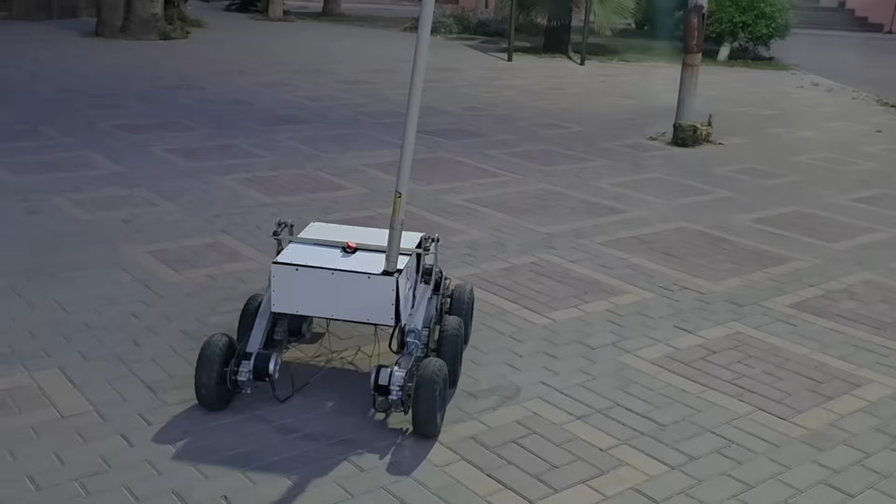Behind every successful rover is a mechanical system designed to survive harsh terrains, carry critical systems, and perform with precision. We are the mechanical sub-team responsible for transforming ideas into fully functional rovers. Our design process began with identifying task requirements and competition limitations. Through research, brainstorming, CAD modeling, and a lot of simulation, prototyping, and testing, we transformed our ideas into Falak. Let's divide Falak into three main parts.

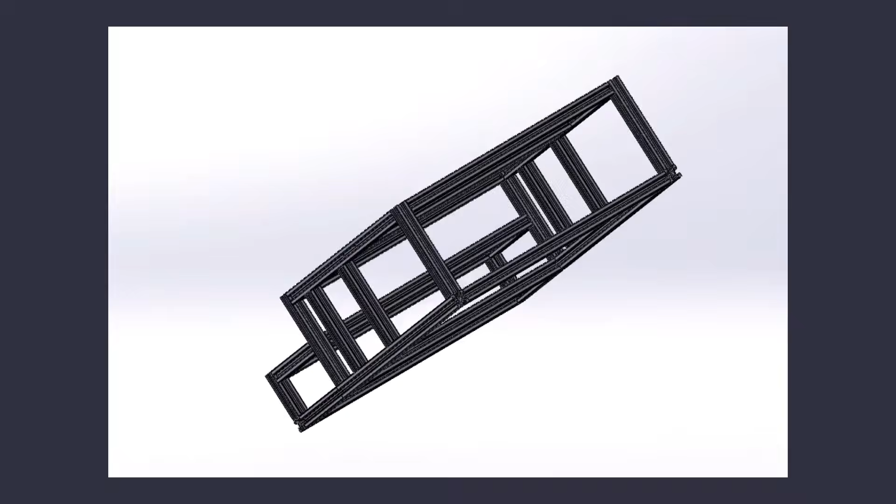First, chassis. The chassis is built from 20 by 20 V-slot aluminum profiles, providing structural rigidity, high strength-to-weight ratio, easy reconfiguration, and efficient housing for batteries and electronics, enabling easy access for maintenance.

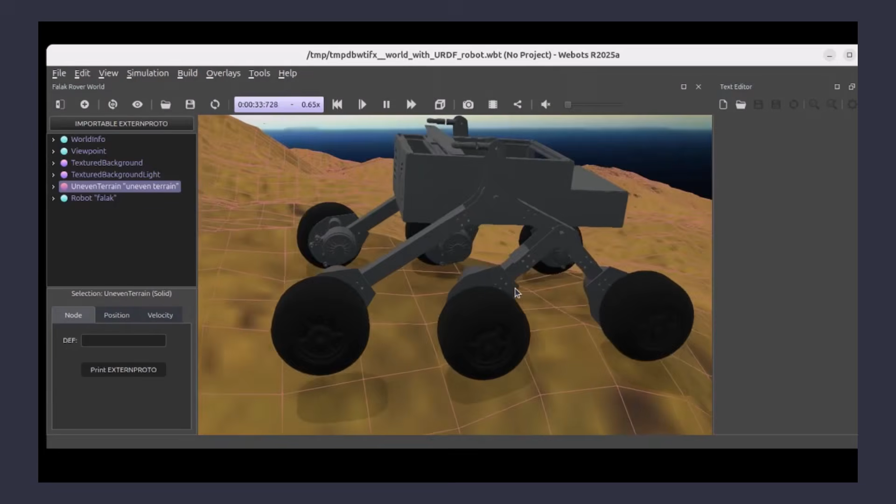The second part is the suspension system. Falak relies on a rocker bogie suspension system. It consists of two rocker arms, each connected to a wheel and a bogie with two wheels, with a central differential part for passive self-balancing over uneven terrains. The rocker bogie suspension keeps all 6 wheels in continuous contact with the ground, ensuring maximum grip, even weight distribution, and high stability.

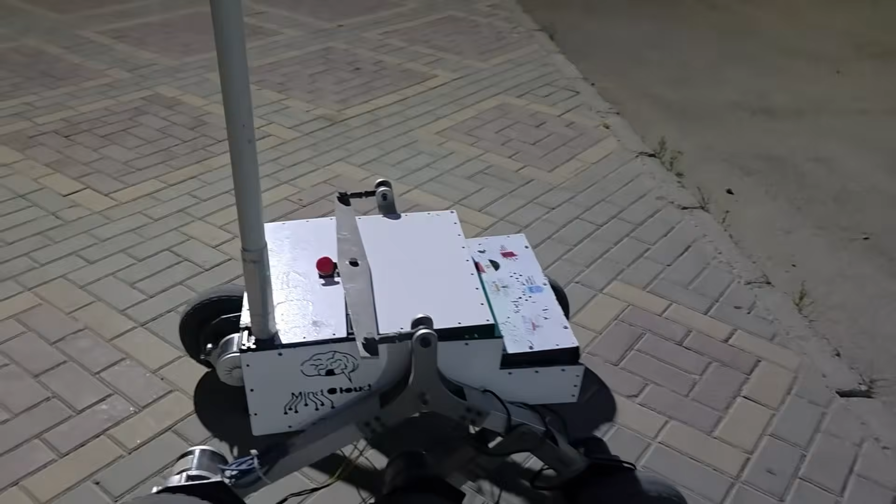Finally, the driving system. Falak has 6 DC motors with 23 Nm torque and 120 RPM, each connected to an off-road wheel, providing high traction over slopes and ability to move in harsh conditions.

Building an autonomous rover requires a robust electronic backbone. Our hardware system is engineered to handle complex data and harsh environments seamlessly. To maximize efficiency, we custom design our printed circuit board from scratch using Altium Designer, utilizing a robust 4-layer PCB design to ensure clean signal routing, reliable power handling, and precision engineering across the board.

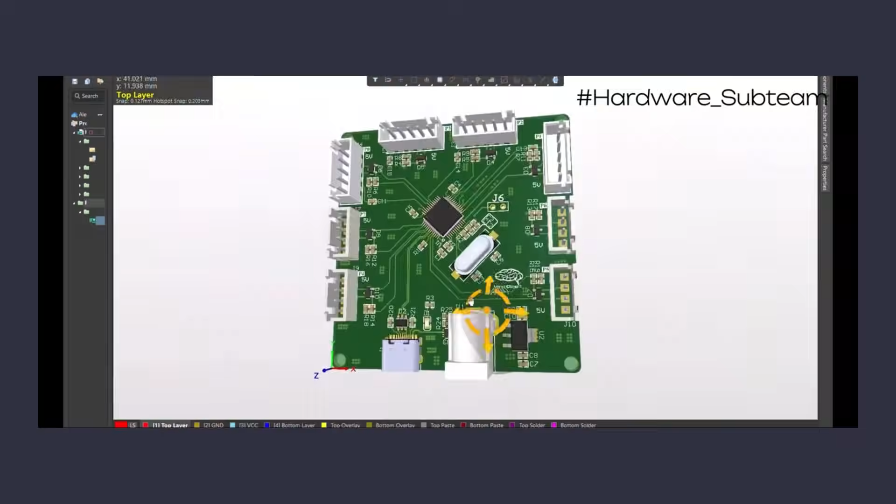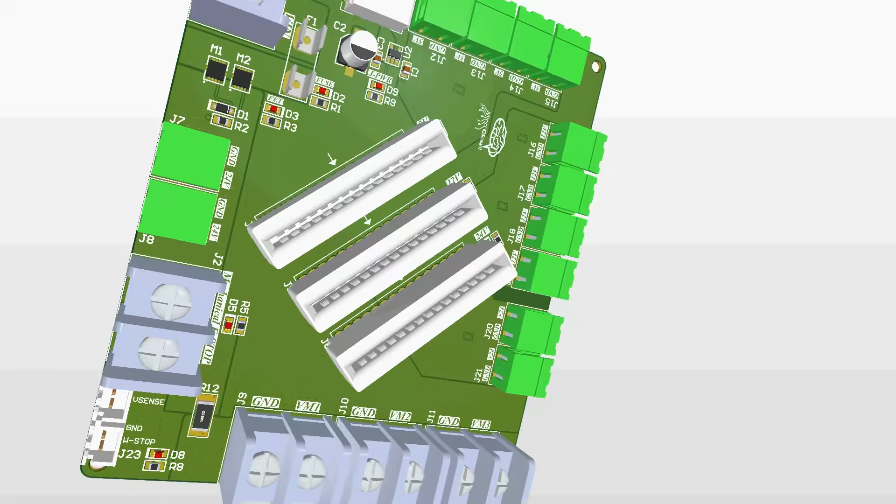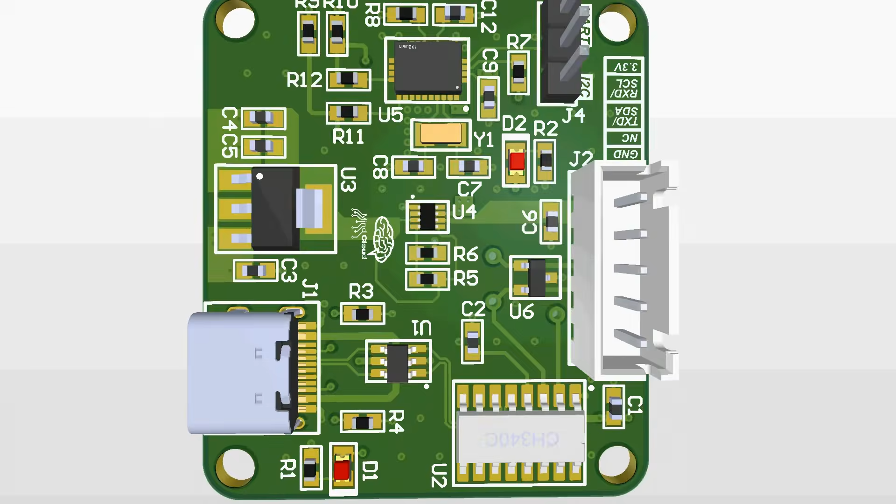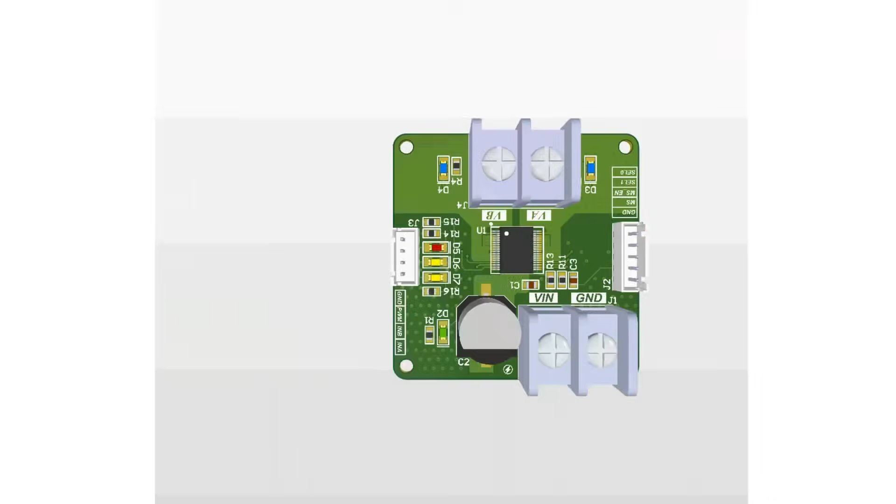Power starts at our high-capacity battery pack, feeding directly into our custom power distribution board. This PDB safely regulates and delivers stable voltage to every critical subsystem. For intelligence, an NVIDIA Jetson Orin Nano serves as the brain, processing high-bandwidth data from our LiDAR, cameras, and custom-designed IMU sensor. The Jetson sends commands to our STM microcontrollers, which manage the core low-level control loops and signal our heavy-duty motor drivers to execute precise physical motion.

From raw power management to intelligent autonomous control, our hardware system is fully integrated and built to explore, and we are ready for the next mission.

Our Rover software system is divided into 3 main departments: communication, artificial intelligence, and autonomous navigation, all working together to ensure reliable and efficient mission execution. The communication team focuses on maintaining stable and secure connectivity between the rover, the base station, and external interfaces during missions spanning up to a 200-meter radius.

To achieve this, we use Zenoh as our ROS2 middleware system, enabling lightweight, fast, and dependable data exchange across the entire system. On the AI side, our team develops and integrates advanced computer vision models that enhance the rover's environmental understanding, object detection, and helping the autonomous navigation system. These models help the rover better interpret its surroundings and respond intelligently to dynamic conditions.

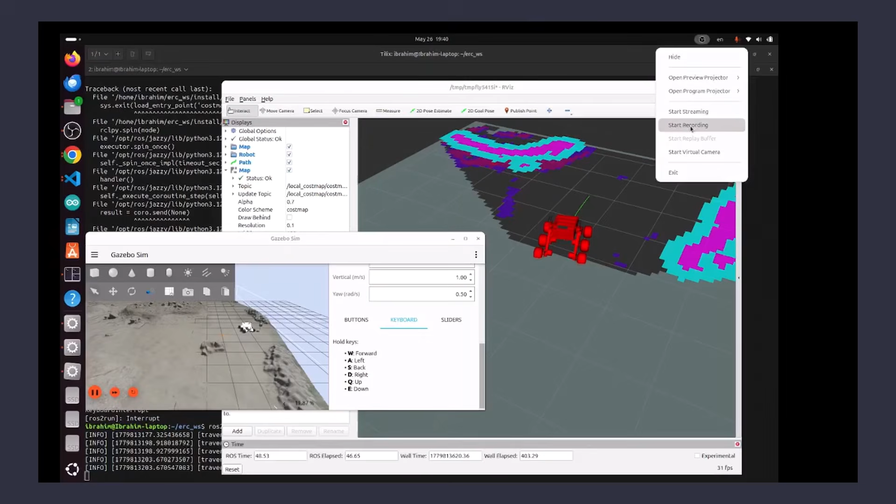The autonomous navigation team is responsible for enabling the rover to safely and efficiently move through complex terrain with minimal operator intervention. Our navigation pipeline follows the perception, planning, and control framework. The perception layer allows the rover to understand both its position and the surrounding environment using sensor fusion, height maps, and obstacle detection systems. Using this information, the planning layer generates the safest and most efficient traversable path, while the control layer ensures smooth and accurate trajectory tracking during motion execution.

To coordinate all rover subsystems during autonomous missions, we also implement a behavior tree mission planner that manages task execution and system-level behaviors in a modular and scalable manner.

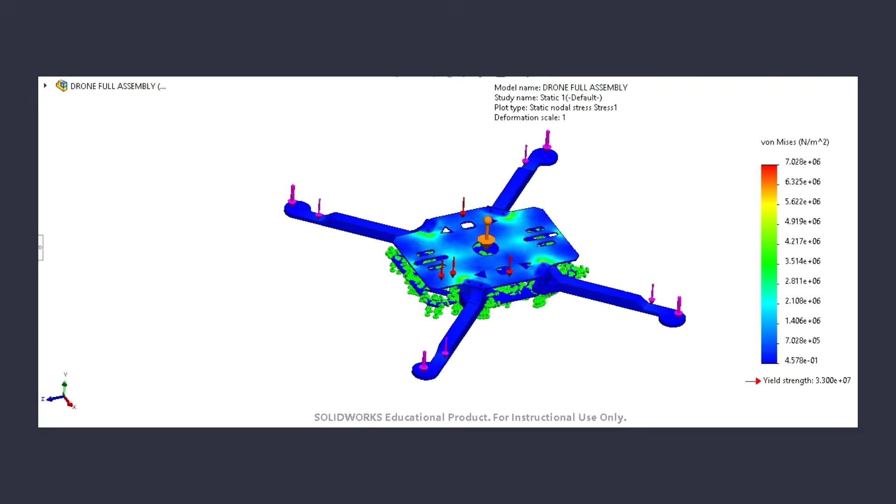For our rover mission, we designed a custom quadcopter to serve as the eyes of the rover for area scouting. We selected an X configuration for the frame to ensure high maneuverability and to keep the propellers out of the camera screen. To optimize the strength to weight ratio, we ran a detailed stress analysis using SolidWorks. We integrated weight reduction pockets in low stress areas. This reduced the mass while maintaining the maximum structural strength. Finally, the entire frame is 3D printed using ABS material, allowing our drone to guide our rover safely.

We set up a complete drone simulation and a control pipeline using ArduPilot SITL and Python. First, we installed and configured the ArduPilot simulator. Then we launched the virtual quadcopter environment with a live map and a MAVProxy console. After that, we connected our Python application to the simulated drone using PyMAVLink, establishing real-time MAVLink communication through heartbeat synchronization. We then built a custom UI interface allowing us to send commands like arm, takeoff, land, move the drone in any direction and to any predefined point.

Finally, we integrated live telemetry feedback including position and speed monitoring, creating a functional ground control prototype that can later be extended into ROS2 integration and autonomous navigation systems.

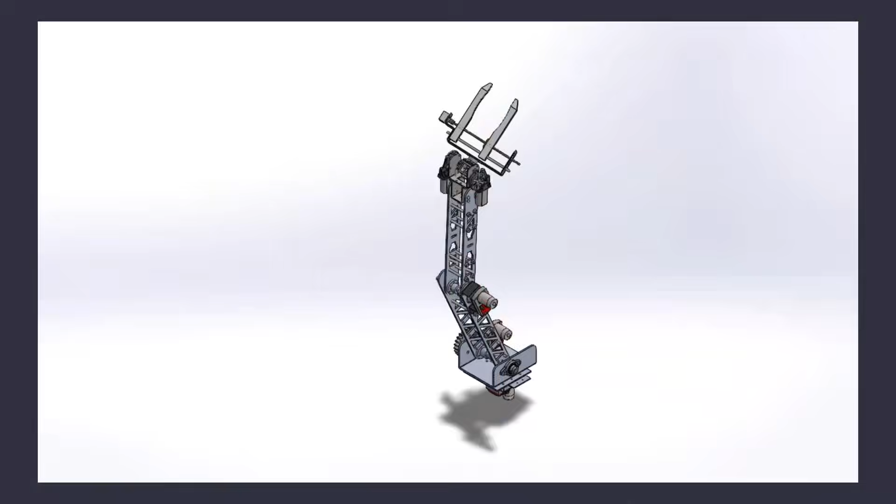Regarding our robotic arm system, it consists of 3 degrees of freedom: rotation of the base, elbows, and shoulders, and using our end effector that also consists of 3 degrees of freedom, the end effector can grab, interact with panels, and collect samples. In the design phase, we use SolidWorks software to design and use topology and other tools to ensure the design is lightweight and cost-effective. In the manufacturing phase, we selected highly durable material that can withstand high stresses like aluminum sheets. To conclude, our robotic arm is suited for harsh environments like a Martian environment.

Our robotic arm is controlled entirely through ROS2. We send goals using either MoveIt or our custom designed script. A path is then planned, and then commands are sent to our controller, which drives the servos in real time and sends joint state feedback at 100 Hz. The system's communication is flexible, supporting both Wi-Fi and wired UART communication, both switchable at launch. We have validated the full pipeline from goal to physical motion. Our next step is integrating a camera within the system and driving the arm using camera detected points.

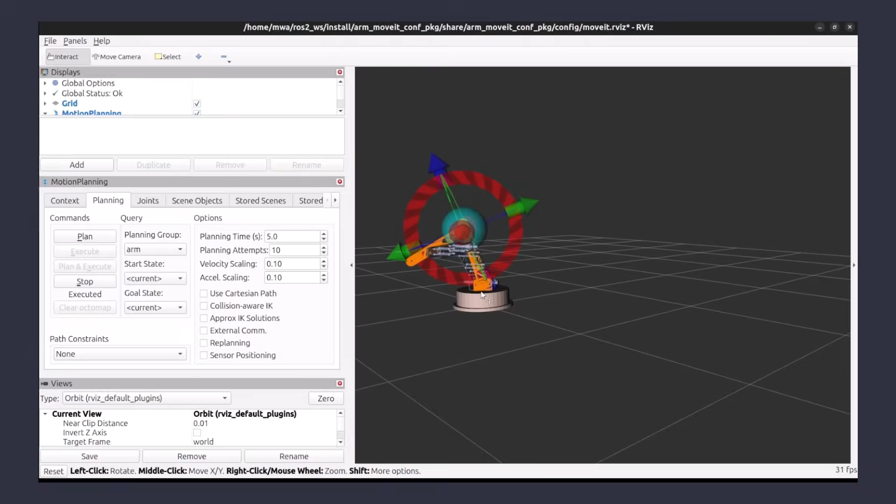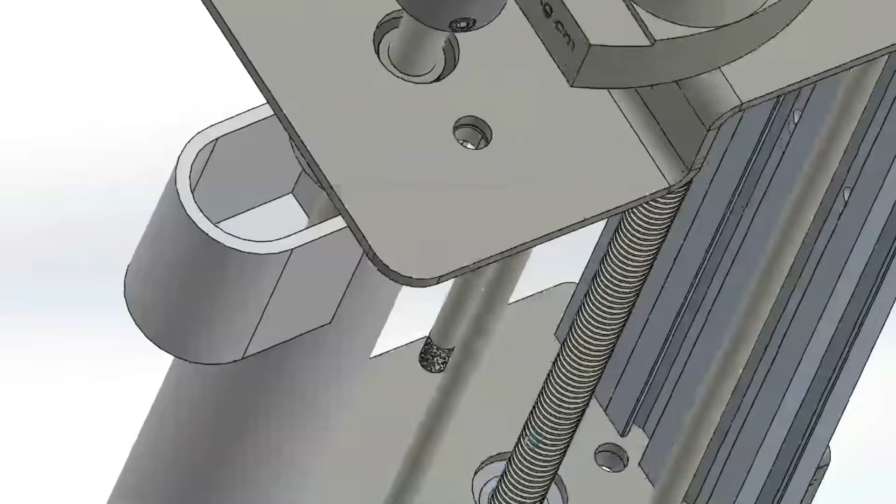The drill collecting mechanism is designed to handle both drilling and sample collecting at the same time. The drill moves up and down using a lead screw mechanism, allowing it to reach up to 30 cm below the ground. During drilling, the rotating auger carries the sand upward, while the cylinder around it keeps the sample contained while moving up, until it finally reaches the attached container at the top of the cylinder based on the Archimedes screw principle. So instead of drilling first, then collecting separately, the whole process happens together using the same mechanism.